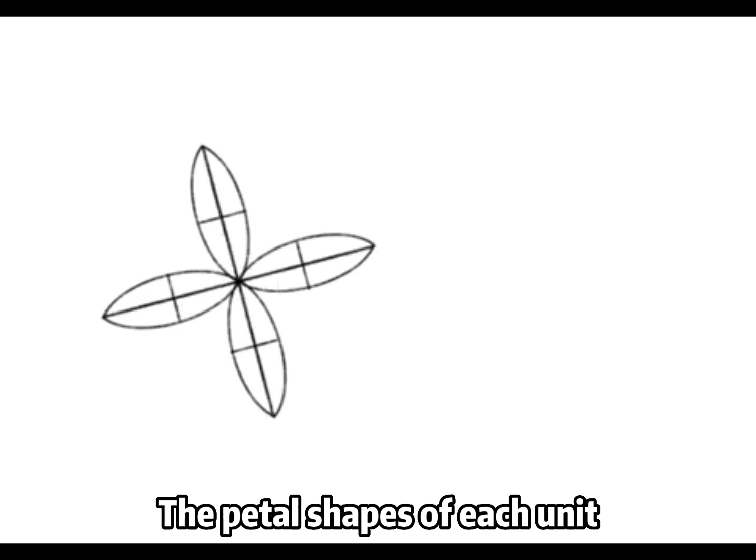We first came up with the idea of designing a structure with kinetic capabilities to adjust and fit in different scenarios, creating a similar effect to a breathing facade. The petal shapes of each unit will bring in variation with natural elements to foster the green and sustainability idea behind it. The sets of kinetic panels are installed on a part of the wall which is exposed to sunlight at most times.

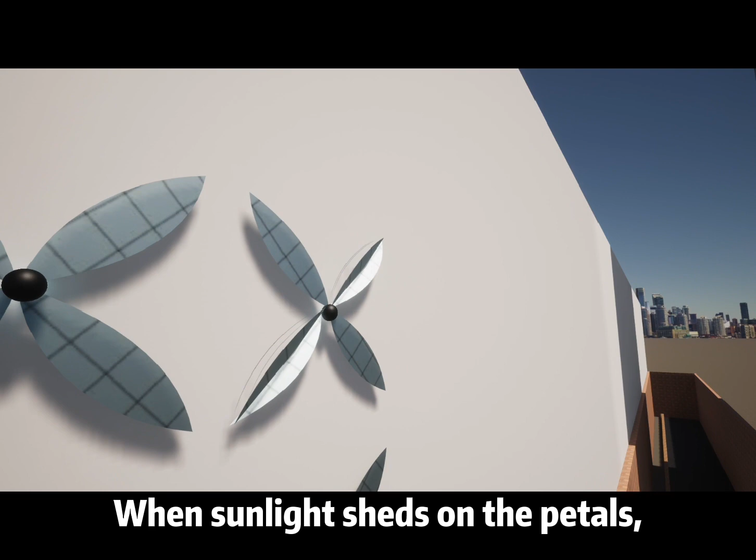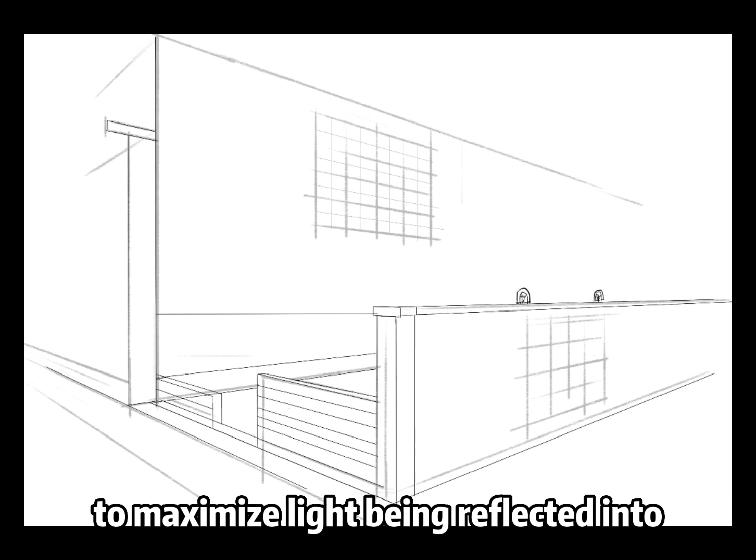When sunlight sheds on the petals, the light sensor captures the signal to transform in orientation, just as how flowers bloom. The direct source of sunlight shifts at different times of day, which changes the direction of the light source. Units of the kinetic installation will alter their angles and orientation to maximize light being reflected into the alley in response to sunlight captured from the sensor.

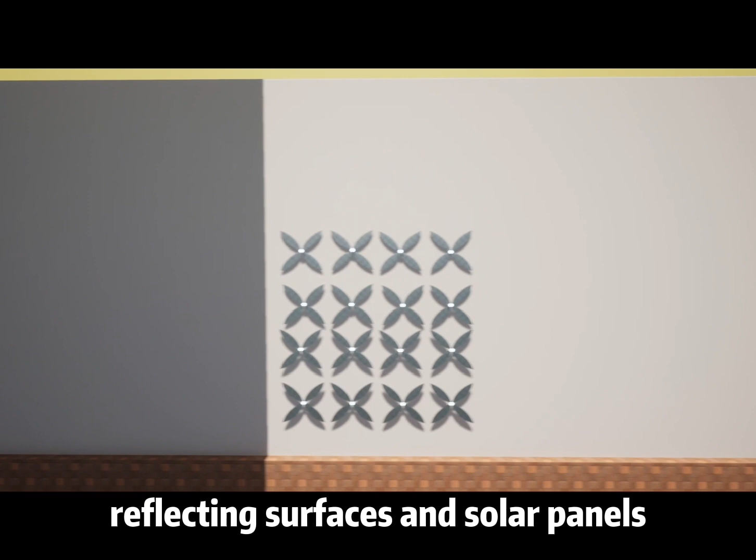The kinetic panels operate both as reflecting surfaces and solar panels to store energy simultaneously. Energy stored will be used to trigger alarms installed on the outer wall to signal surroundings when the fire alarm breaks from the fire station.

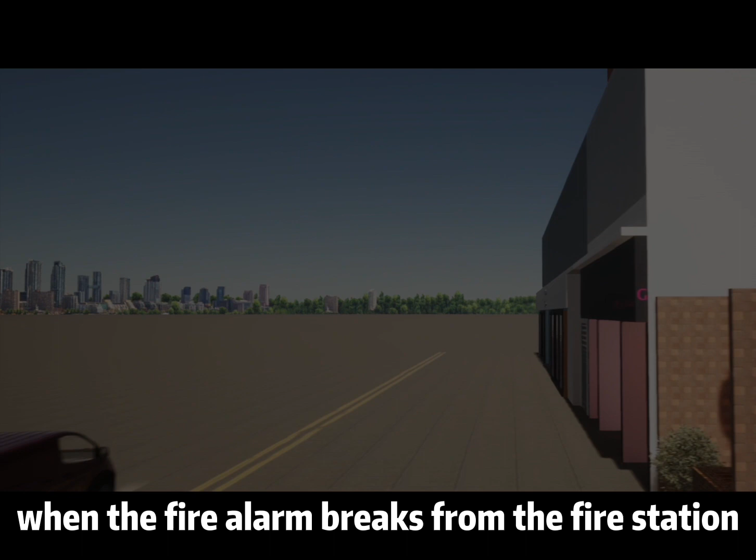Speaking of how to boost the function of our design, we elaborate the idea from biomimicry of lobster's eyes. The eye of a lobster focuses reflected light onto the retina using a perfect geometric configuration of square tubes, which brings us inspiration on manipulating the structure of the design and their orientation to maximize the brightness reflected from the wall.

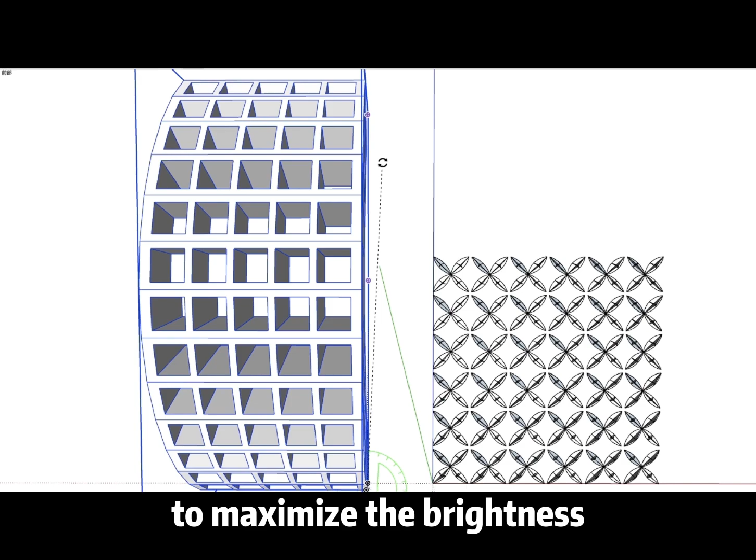Structures with low refractive index would create an efficient reflective system, reducing waste of energy during transmission. With this modified structure, we expect to bring greater brightness to the spot.

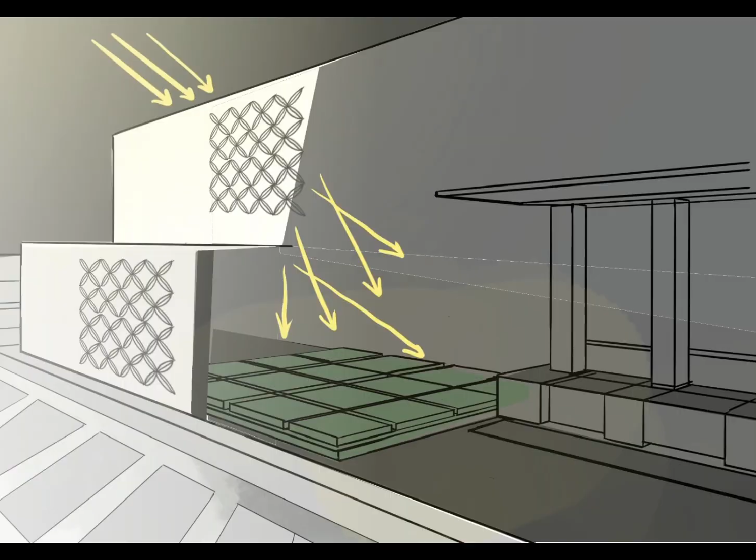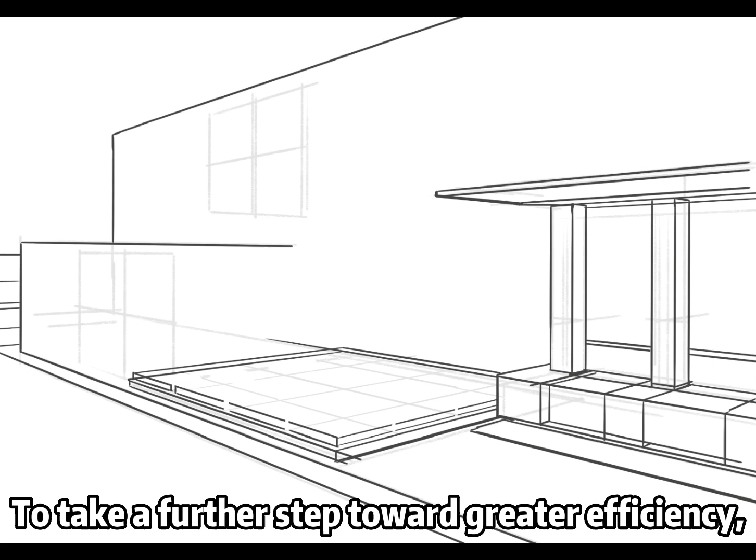To power up the motion of our kinetic design, we came up with the design of a walk-on panel by combining another biomimicry example and the use of smart material to achieve a sustainable powering mode. There have been innovative attempts, such as Pavegen, on developing piezoelectric powering floors.

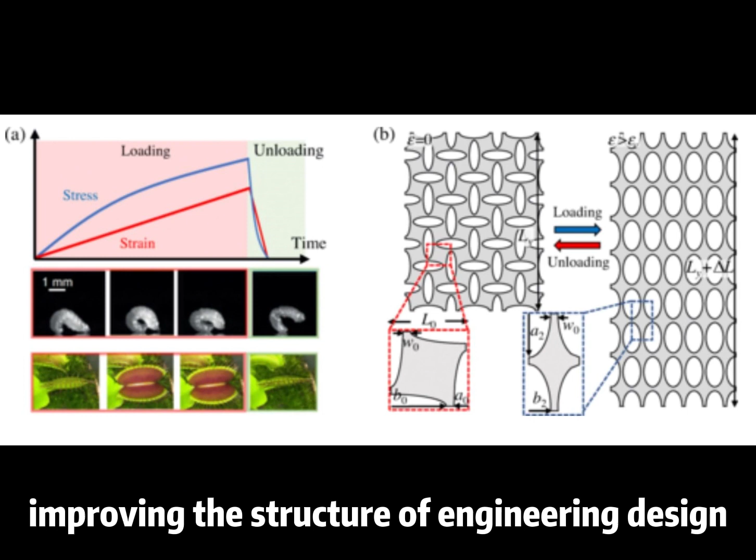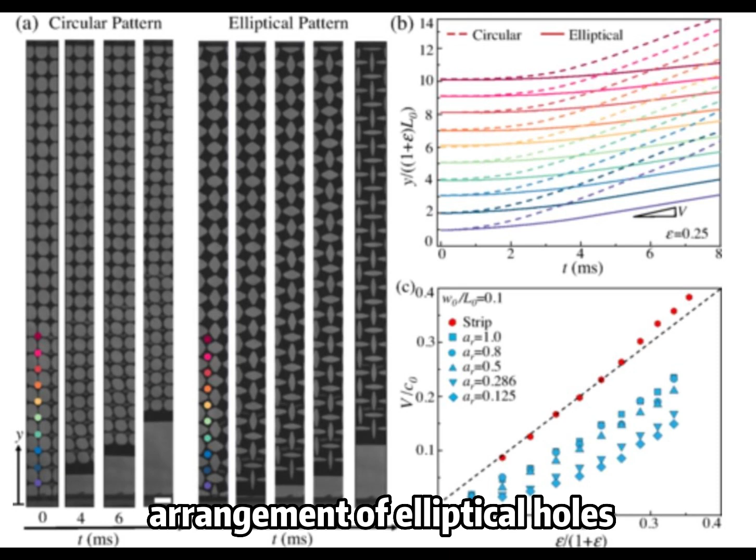To take a further step towards greater efficiency, our step-on panel will adapt technology and a creative approach. The motion of the Venus flytrap, a carnivorous plant's trapping structure, inspired experts in metamaterials to explore the application of impulsive deformation on improving the structure of engineering design, to recoil at high acceleration but low inefficiency in energy trade-offs during impulsive elastic recoil. By using a polymer spring with a unique arrangement of elliptical holes, inspired by the Venus flytrap, more elastic energy will be saved, thus performing the energy conversion process at higher efficiency for powering from the panel.

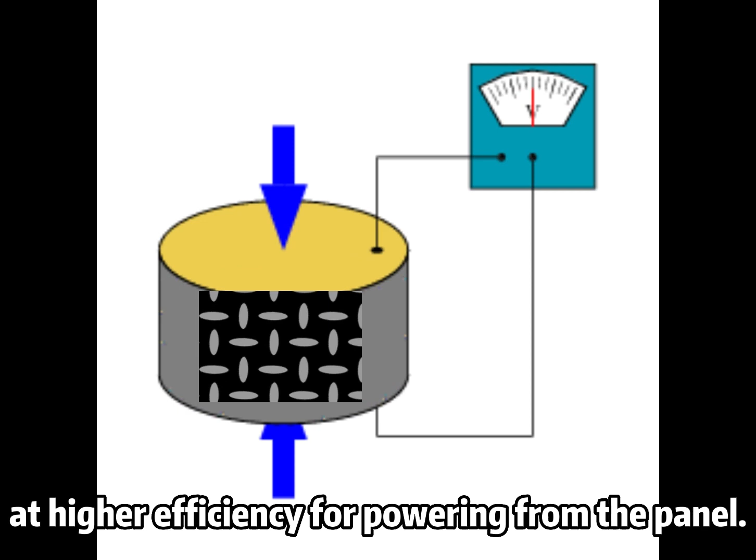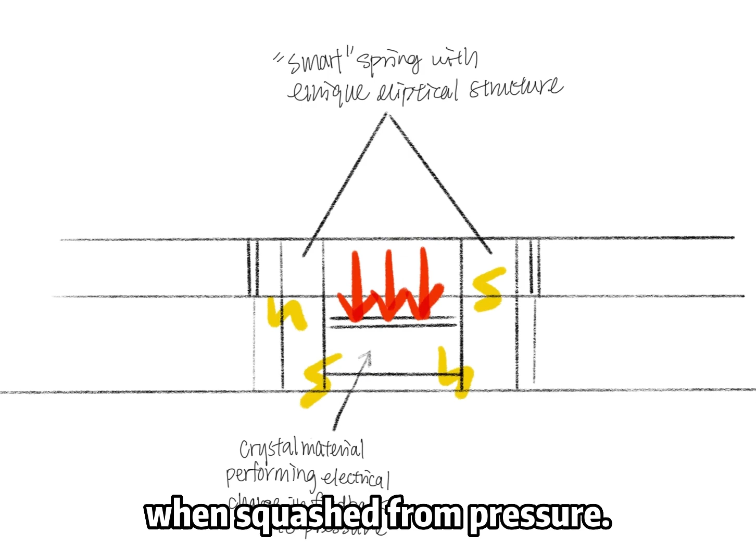In addition to this strategy, the walk-on floor panel is designed to perform a piezoelectricity process from people's activity. Embedded power-generating blocks will produce small electrical currents when squashed from pressure. Such smart use of material generates energy at zero variable cost, purely from people's steps and movement.

By incorporating biomimicry into both of our designs, we aim to bring more awareness on preserving the sustainability of our environment towards the public. It would be unfortunate not to utilize evolving sustainable technologies, now and in the foreseeable future, into application in different fields. Through our project, we hope to apply the phrase: from the nature, to the nature, and by the nature.